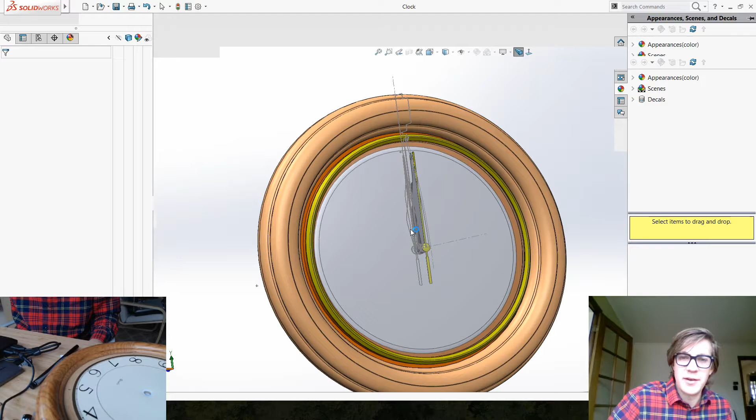Alright, so I'm going to set this down too, and first thing I'm going to do is go back into my SolidWorks model, so let's go find that. We'll build clock animation, here's my SolidWorks part. It's fine, I don't know what changed there. I'm going to open this back up and grab a few key dimensions that maybe I missed when I was just sort of estimating without taking this thing apart during my first build, and that was sort of the video before this. If it's close enough, this is looking pretty close to me.

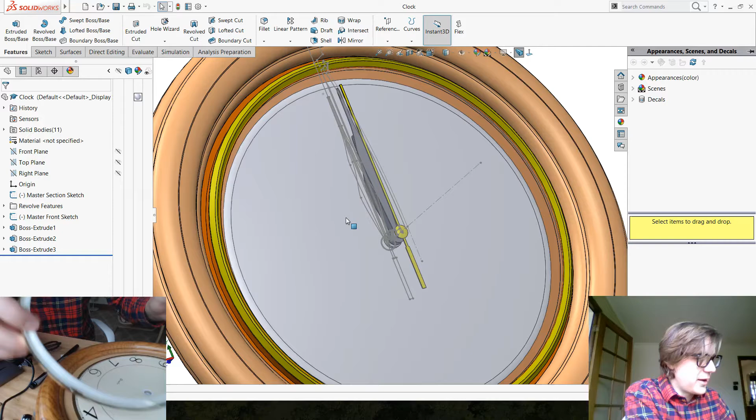The one part that I kind of missed was inside this glass part. There's another piece of plastic that held the metallic bezel to the glass and held everything in place. So I might build that really quickly because you do see sort of the inside of that in the rendering. I guess we will see that in the rendering. So I'm going to go back to my master sketch, which I had set up on the right plane, square up to it, and it sort of fills in the gap between the clock face and where the glass is, so I'm going to just add an extra line here.

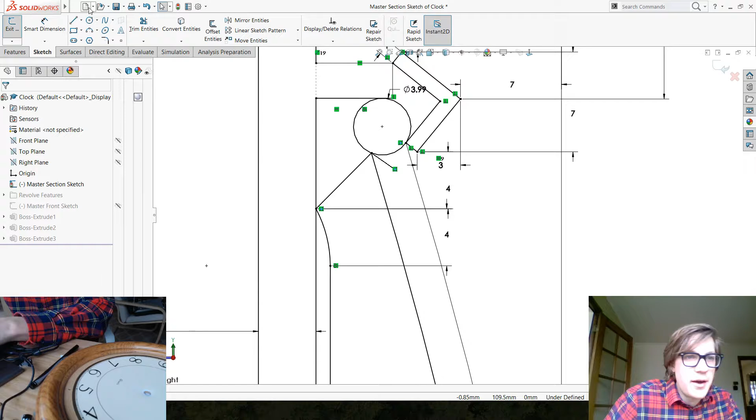Again, because this is purely aesthetic, I'm just going to set this up in a way that I can build a quick part in my revolve. Sure, it's like a millimeter thick, not that important for this aesthetic model, but what is important is I'm going to go back.

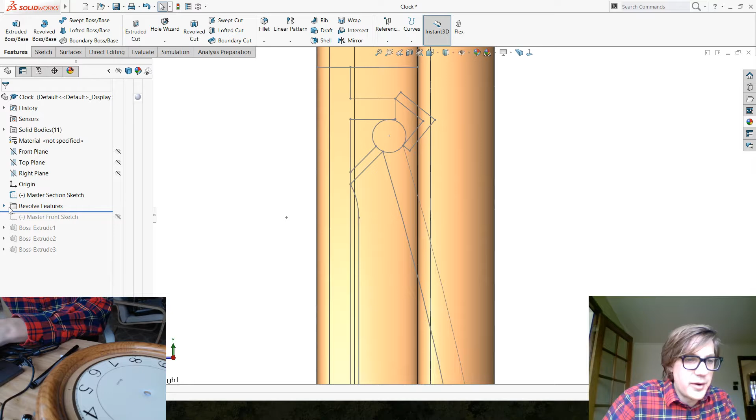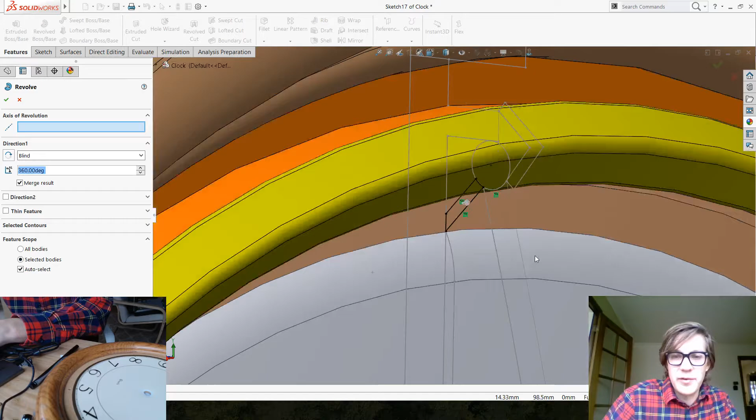I'm going to actually roll all the way back to when I was building my revolve features, sketch in the right plane again. Convert a bunch of lines from my master sketch to build this extra plastic piece that I discovered once I tore this thing apart. Make a revolve feature. I should be able to pick this line from the master sketch since I've been converting it. You can see where that part's going to revolve around. I don't want to merge the results, I'm going to just say OK, and it puts it in place.

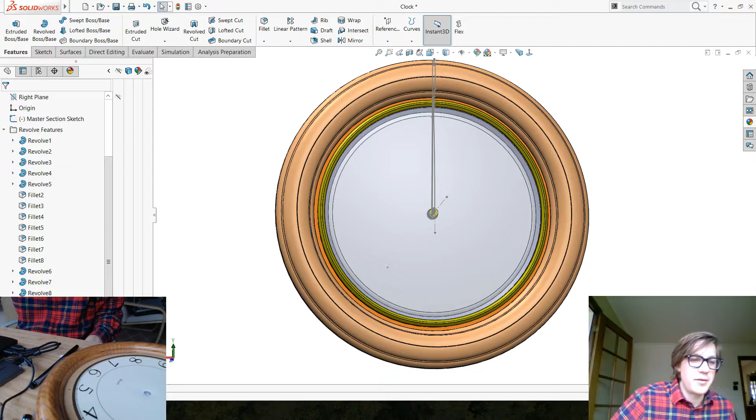There we go. Okay, alright, so there are a couple things I want to do, let me just drop this in here. Aesthetically, to make sure this clock is ready for me to bring it into Keyshot, these are also things that I sort of noticed on the real clock as I took it apart.

I will add a couple more aesthetic fillets, but a big one that I think will make a big difference in Keyshot - I noticed the wood grain, let me switch cameras here to my desk capture. You'll notice on the outside of this frame, the wood grain kind of changes as you work your way around the edge.

That's because there are a couple joints between different sections of wood. I'm going to try and make that - I forget what kind of joint that is, a biscuit joint maybe - I'm going to try and make that cut in my model so that when I import these different parts into Keyshot, I can apply my wood grain texture to each part with a different mapping.

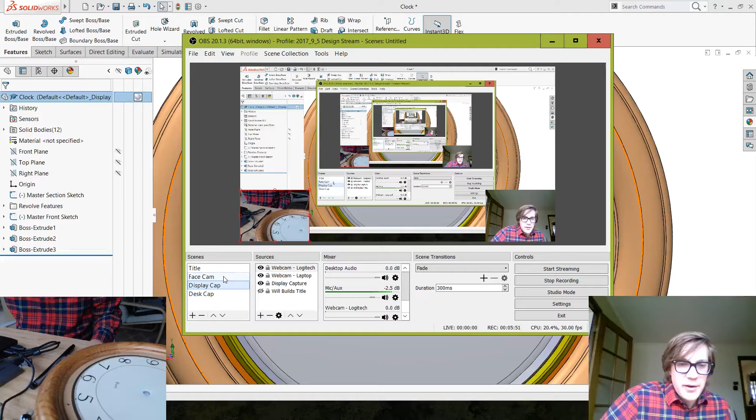So let's go back to display, and I'm going to have to set up a plane really quick. I'm actually going to use a top plane as a reference to create a new reference plane, and I'm going to make it at a 45-degree angle from my top plane.

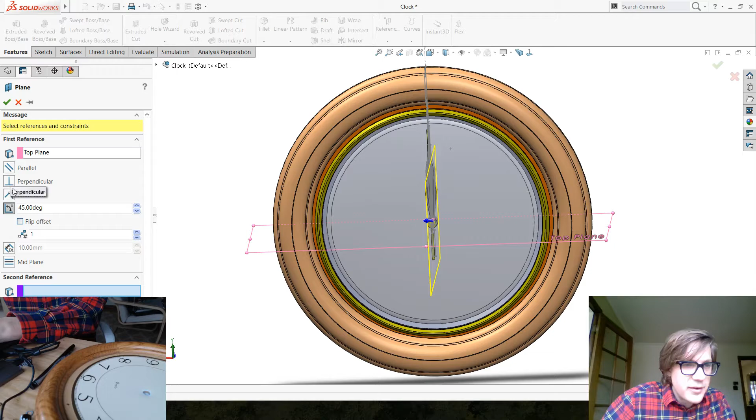I don't really need a second reference, although I feel like it didn't quite do that. My second reference is the angle, like an axis that I want this angle to be at. Okay, so see, I'm setting up a plane that's 45 degrees different.

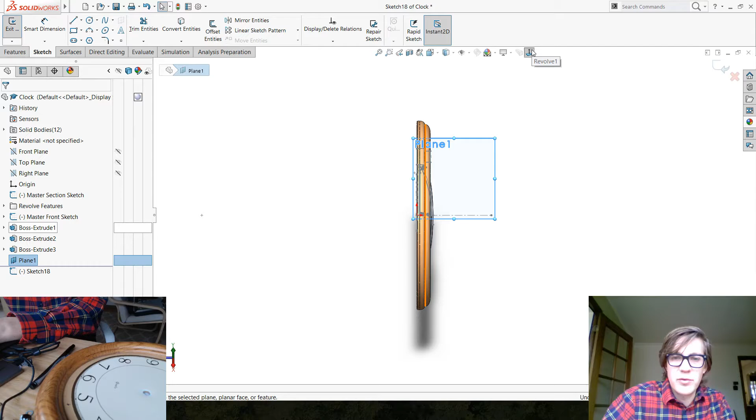Okay, I'm going to sketch on this plane, and I'm actually going to build in this biscuit joint, I think that's what it's called, onto my wooden part. So it looks like from the front it kind of dives in most of the way down the arc.

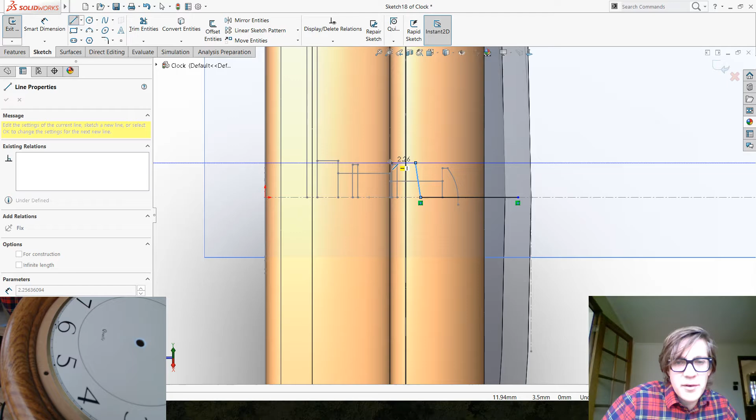It jumps over, dives down, to here, cuts back over, does two of these kind of things, before it goes back to center and then all the way out the other side.

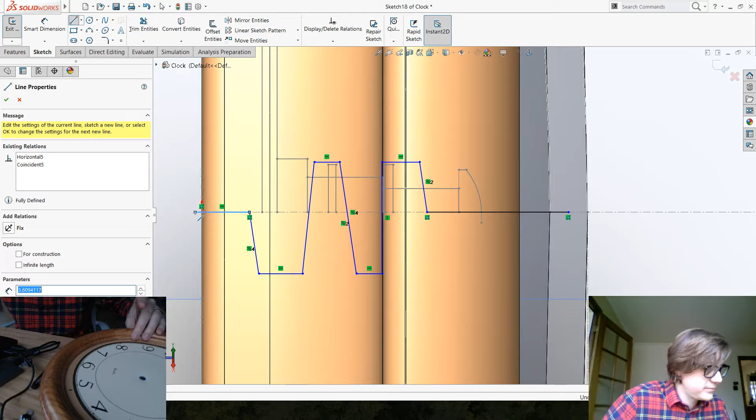Okay, again, I like to sketch this stuff in rough first, then I can do some dimensioning based on some measurements. So I'm going to turn on my calipers. It looks like that whole joint is about 9 millimeters wide, so from the center, that means it should be about 4.5 millimeters.

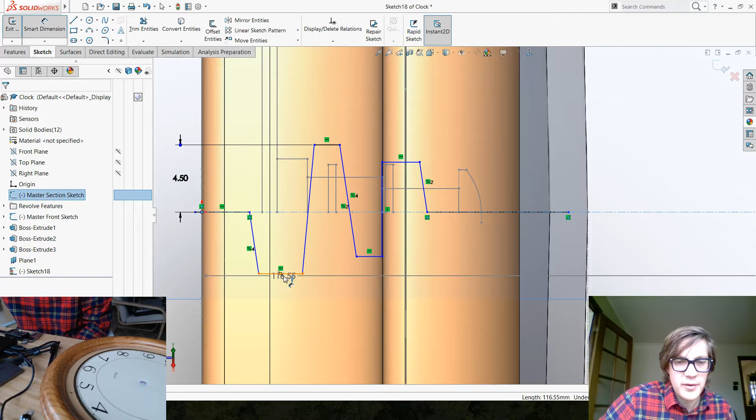From here to here, same. I'm going to make sure that these lines are collinear. I'm going to just add a quick relation there - make these collinear.

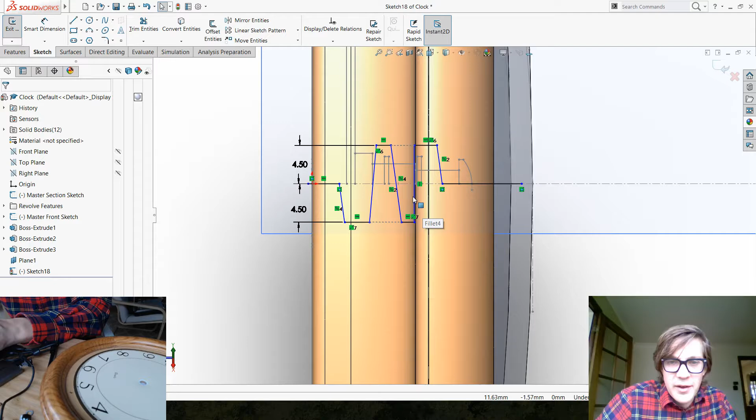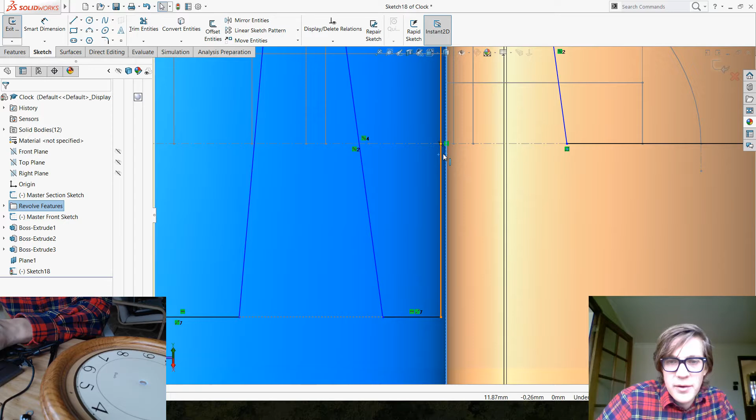Alright, I am drawing, I kind of rotated here. I want to make sure that this flat line is even. Oops, let's see if I can pick that line instead of the surface. It's kind of tricky. There we go. Shoot, try again.

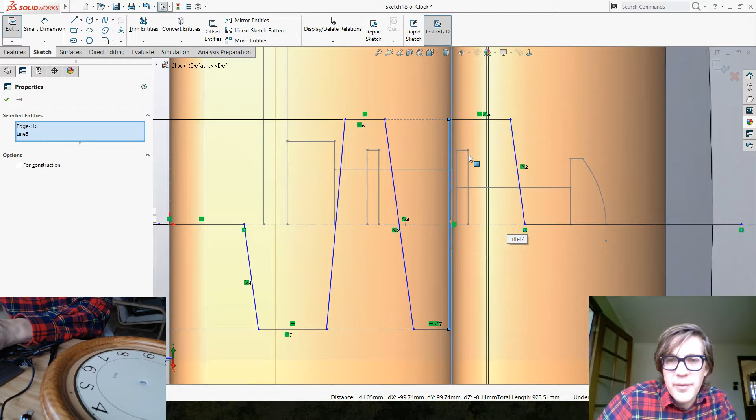I'm trying to make this line coincident with this edge right here. Come on. Yeah, there we go. Man, maybe it doesn't want to let me do that. You know what? I'll make it close - I'll make it coincident with this point here instead, and we'll just see how it looks.

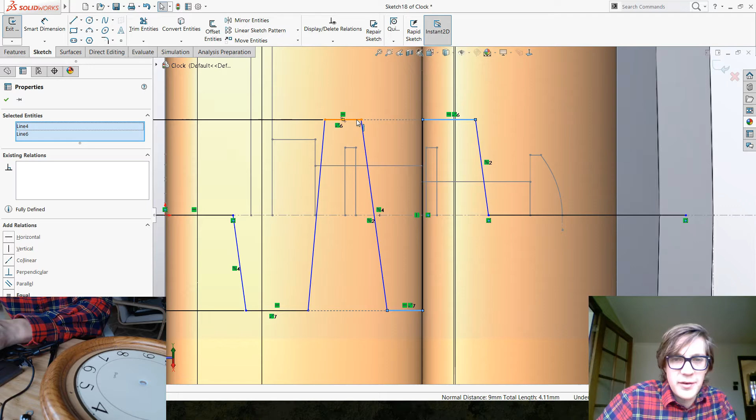Alright, so it looks to me like all of these edges on my joint are roughly the same size, so I'm just going to set those to equal. They're even.

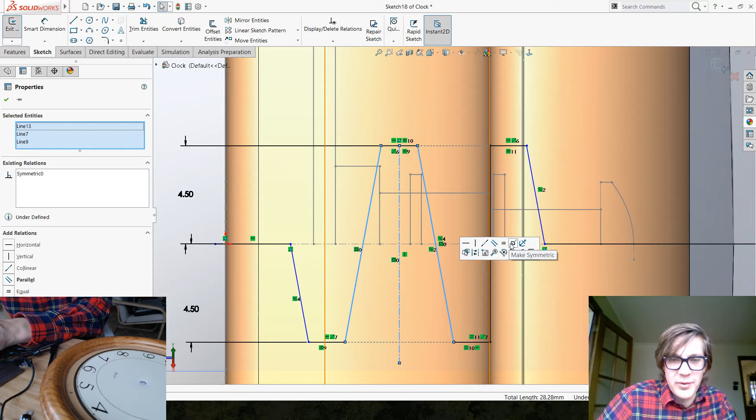So I'm going to use a center line here to say that these should be symmetric or reflections of one another. That kind of squares everything up. And how wide are those? About 3 millimeters.

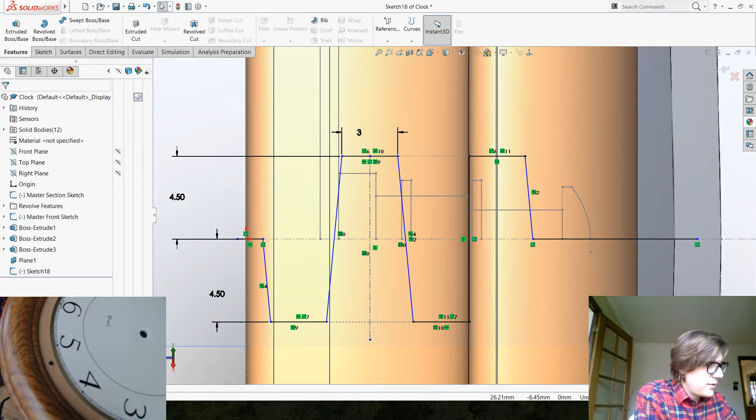Alright, I should be able to get some measurements here too. So from the top down, that's about 4.5 millimeters.

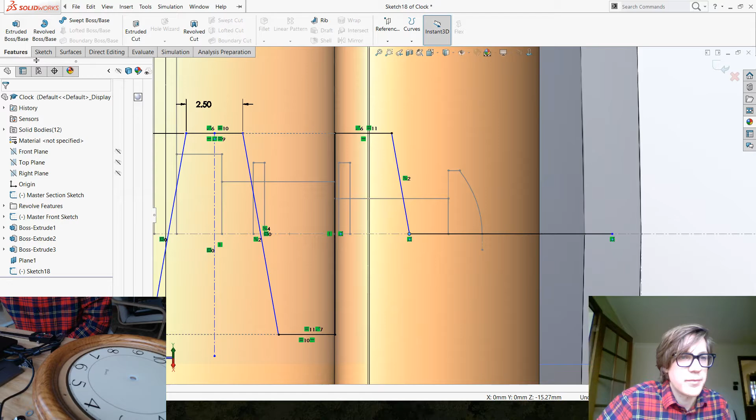Actually we'll go from a more solid point here - this is actually closer to like 2.5, because from here to here is about 3.25. That actually looks a little off. I'm just trying to get the shape right here. Let's try 3 - okay, that's actually pretty good.

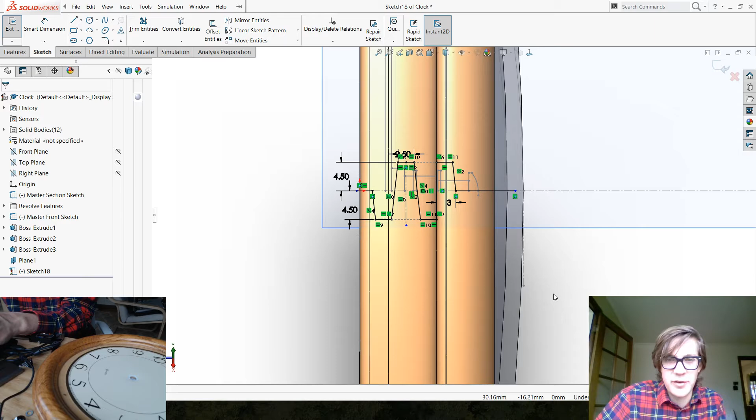So you can see I'm sort of sketching in this biscuit joint kind of thing, again not sure if it's a biscuit joint. Let me get out of this. So notice I didn't put this sketch on either of my two master sketch planes because it actually needs to be sketched in a different plane. But following the same rule, I'm going to label this master joint sketch, save.

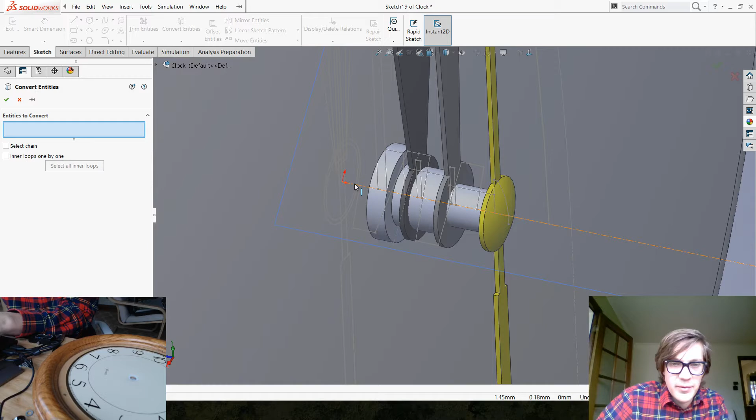Before I do a cut, I'm actually going to create another sketch on that same plane as my joint sketch and convert all of those entities over. So actually, I wonder if I might even be able to just pick the whole sketch and say convert it - yeah, that's good. Okay, now because I want to use it to split apart this wooden outer bezel, there are a couple ways I could do that. I think I'm going to actually do it as a surface, and you'll see why in a second here.

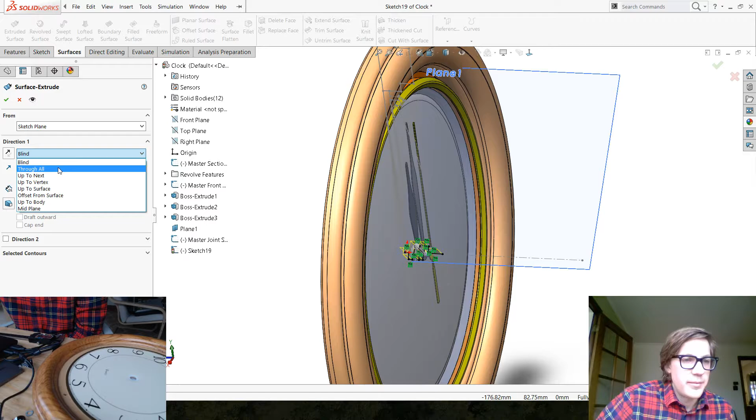I'm going to do an extruded surface through all, in both directions, so it's going to intersect the entire thing. I'm going to say okay, go ahead and do that.

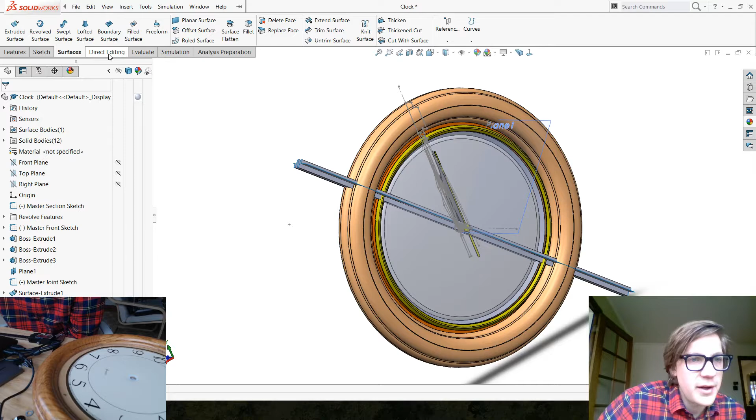Because I need to actually cut this part into 4 sections, I'm going to use a direct editing feature, the circular pattern, and instead of patterning a feature, I'm going to pattern a body.

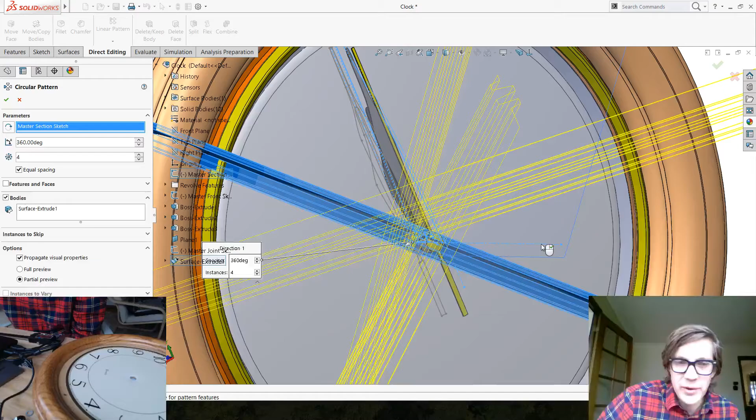In this case, the body I want to pattern is the surface body. How do I want to rotate? I want to rotate around—I wonder if I need to build an axis. Yeah, it doesn't like that. Let me clear that selection.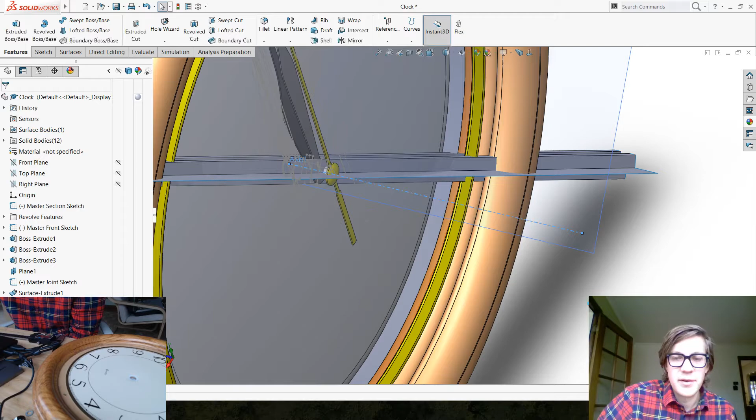Before I can make the circular pattern, I need to make an axis of revolution. So I'm going to go back into my features, make reference geometry, and instead of a plane, make an axis. I should be able to just pick a line here, and say okay, now I have this blue dotted line axis.

Now I should be able to do my circular pattern, either in features or direct editing tab. Again, I'm going to pick a body. I want to pattern this body around that axis, if it's hard to pick. And I only need 2 of them.

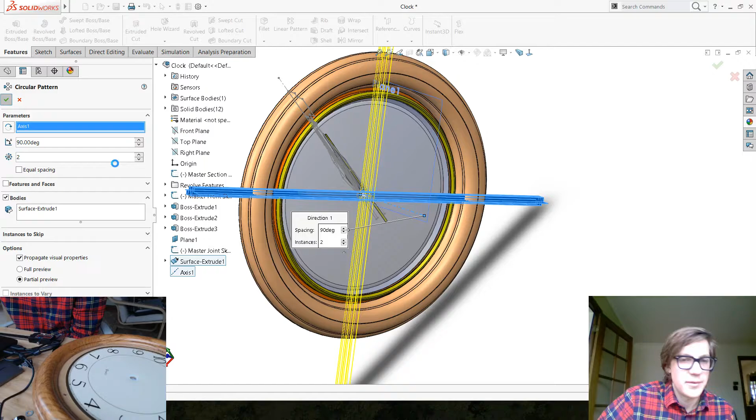I want it to be 180 degrees—nope, not 180, 90 degrees. There we go. Okay, so see how I have these cutting tools. You can almost think of them as a big blade that's going to cut this thing apart.

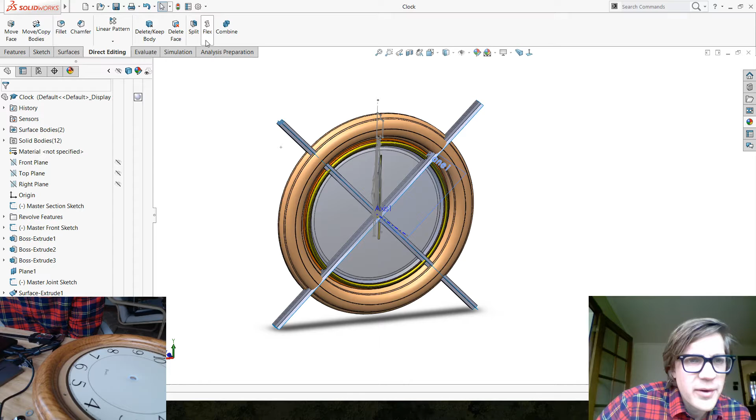Now that I have that, I'm going to save, and I think I'm going to do this as a split. I think that's in direct editing. Split—I'm going to use that surface and that surface as my trim tools.

My target bodies that I want these surfaces to split are really just this one. Oops, I got to pick down here. This body.

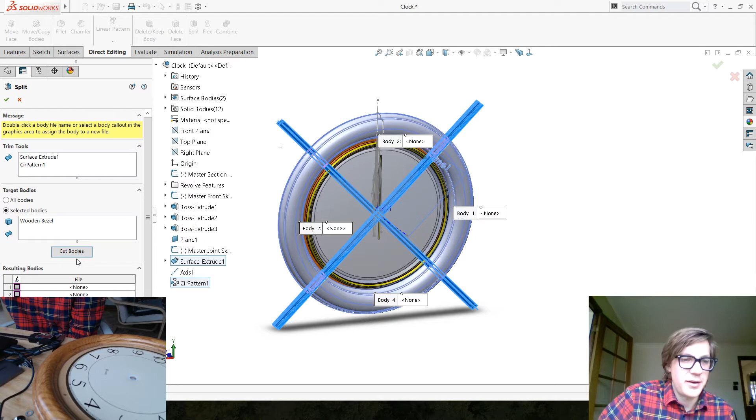Go ahead and cut the bodies. And yep, all 4 of these are the bodies that I want to keep. So I'm going to say OK.

Ha! Hold on, let's edit this. I don't know why it deleted them. Oh, I don't want to consume the cut bodies. There we go, so they should be cut.

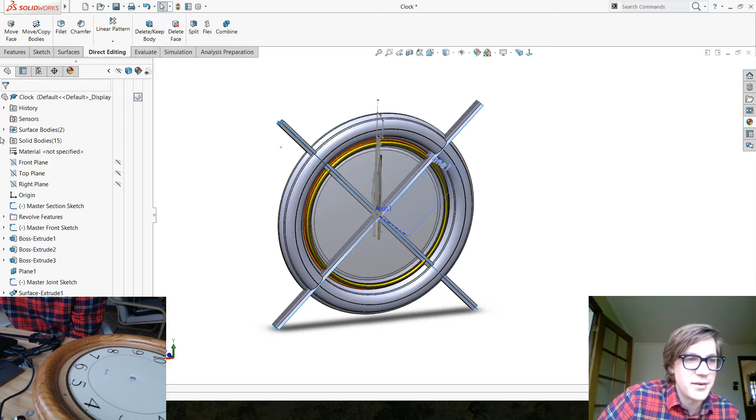Let's go into my surface bodies, and I'm just going to hide both of those. Okay, cool, see how it has that joint on the side?

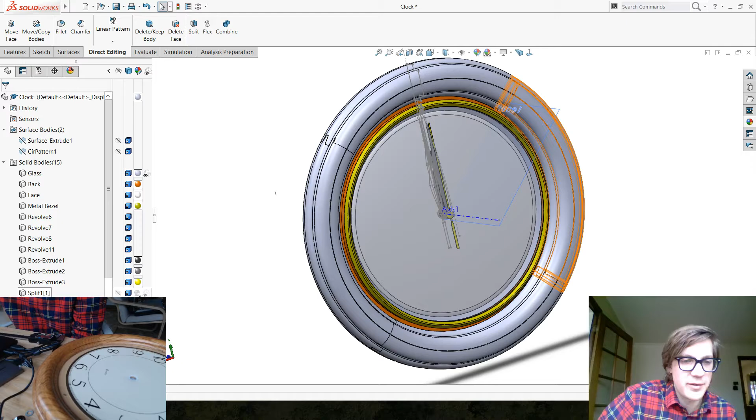I'm going to open up my solid bodies folder, and it looks like, yeah, I've got 4 brand new bodies based on my original outer piece. Just to make it easy for me to see, I'm going to change their colors to something so I can tell the difference and see what those joints look like.

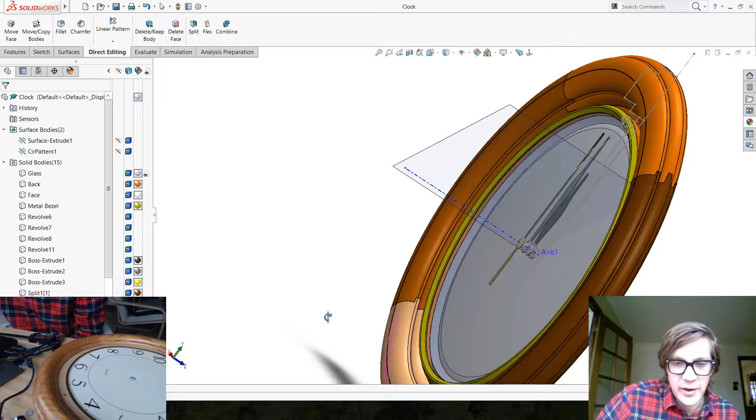Save. Okay, yeah, you can kind of see that I've got those joints working their way through that part. It's a subtle detail that'll make a difference once we actually render this thing.

Okay, that was the big change I wanted to add to the model, and I think we're pretty good. So I think it's just about time to bring this thing into Keyshot. There's one more step that I'd like to make, so I'm going to save this one more time.

Minimize this down, and the next thing I'd like to do is go to my face cam. So the clock has a face, which is really just a printed piece of paper. I used my phone to take a picture of this, as straight on as I possibly could, and rather than rebuild this in Illustrator, I'm going to bring it into Photoshop and make sure it's nice and round, and we're going to actually use the photo as a label in Keyshot to apply exactly this graphic to our rendering. Alright, so let's open up Photoshop.

It really doesn't matter the size of the image in millimeters, as long as I have enough pixels, a high quality image, and it's perfectly round, it should map just fine. So I'm going to create a new file. It really doesn't matter how big this thing is.

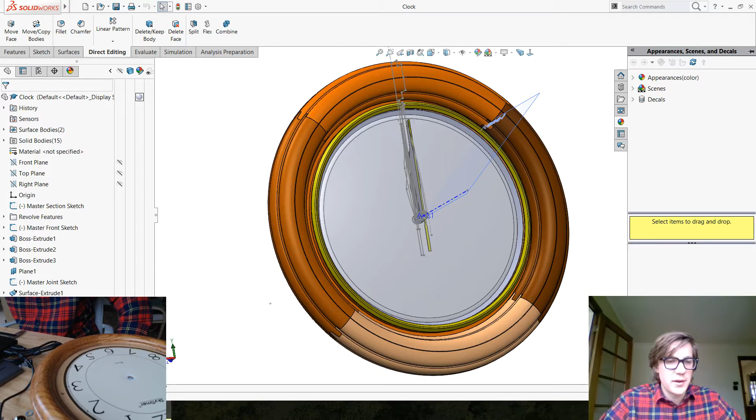And actually in Keyshot, I'm going to pause the real-time rendering because it takes a lot of juice from the graphics card - or no, from the CPU.

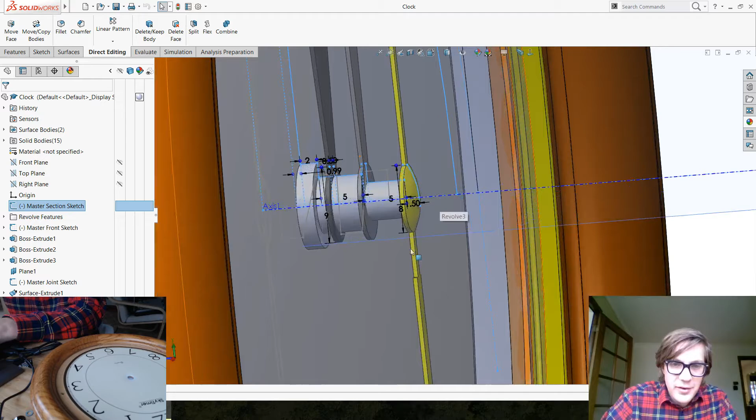Okay, so fortunately I'm using a master sketch, and there are a couple ways I can do this adjustment. I might just reduce this down, which should move my hand in. If I save this, I'm going to right-click to delete these two surface bodies as well, because I don't need them in my Keyshot part.

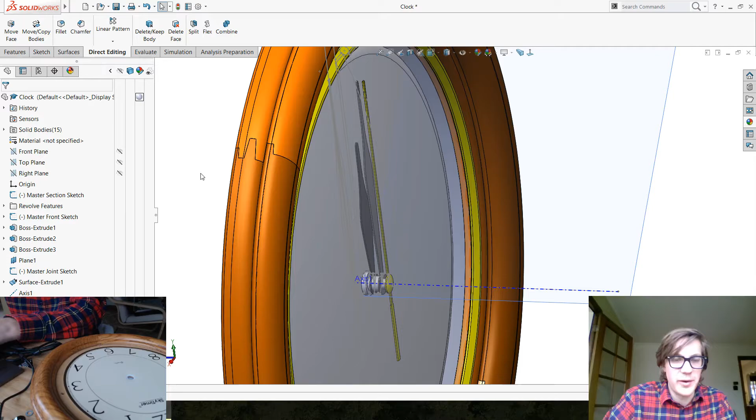Save that part, we'll go back to Keyshot, unpause, and let's see if this works. I should be able to re-import that same part and say update geometry.

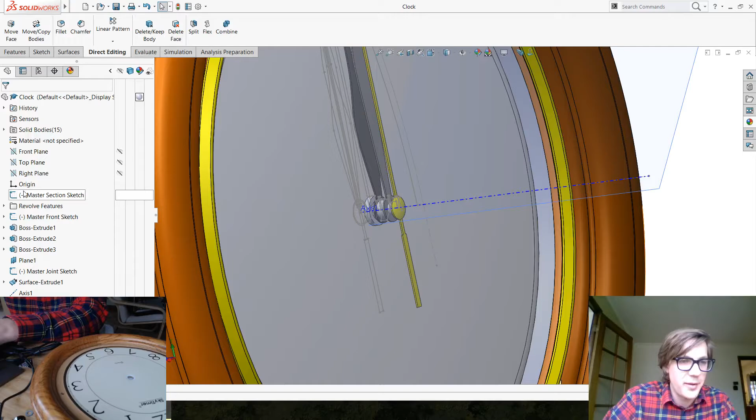Yeah, there we go, and you'll notice it just updated the existing part. Looks like it's still poking through a little bit, so I'm going to go back into SolidWorks and do the same thing again in my master sketch. These were estimates when I originally did them.

Let's see, I might actually go into that sketch, look at it, and move some of this stuff around a little bit more. Looks like we were close.

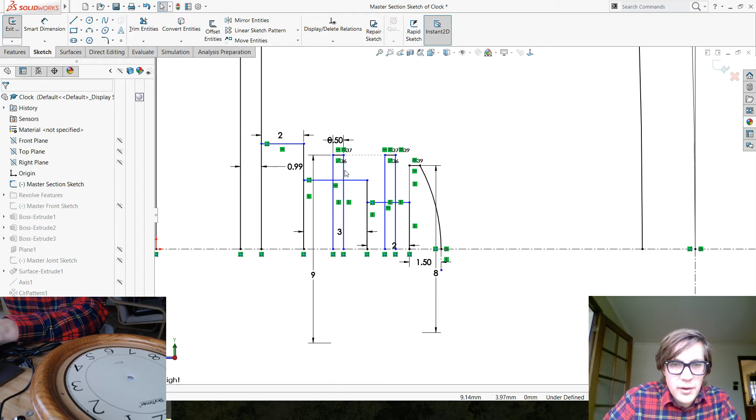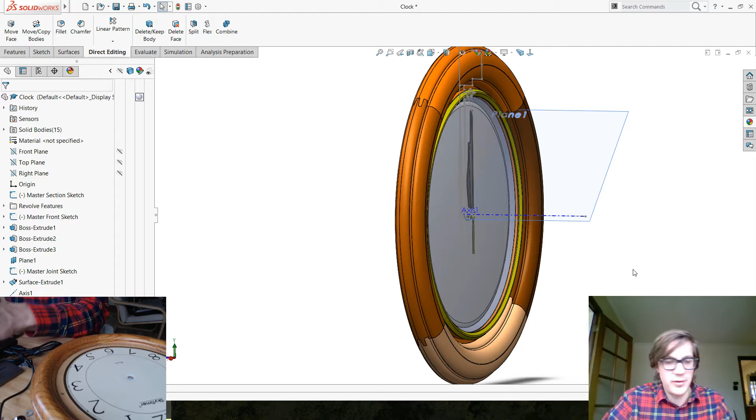Just changing some of the offsets of this stuff. And because we have it set up as a master sketch, all of these movements I'm making in my one master sketch should update my real geometry and all of the sketches I used, like converting them from the master sketch. So I'm going to save the part, go back to Keyshot.

Import the same model again, make sure instead of add to scene, I'm updating geometry. Okay, now I don't see that clock hand poking through like it was before. So I'm going to save my Keyshot file.

Clock Animation. Okay, I think we're off to a pretty good start.

Now, the first part of this Keyshot demo, I'm not going to explain too much. A lot of you guys are already familiar with the basics of dragging materials over in here, and we'll do lighting and all that good stuff too. So we'll start with a really basic - you know what, we don't have to do the environment yet. We'll do some basic material application stuff.

We'll start with wood because that's always fun. I'm going to use procedural wood so I can get the grain looking proper on all four of these parts. And I am going to want to change the orientation of the grain on two of these.

Mapping tool, where is the angle? Alright, so I'm going to rotate this 90 degrees. Okay, so now the grain is going a different direction on both of these.

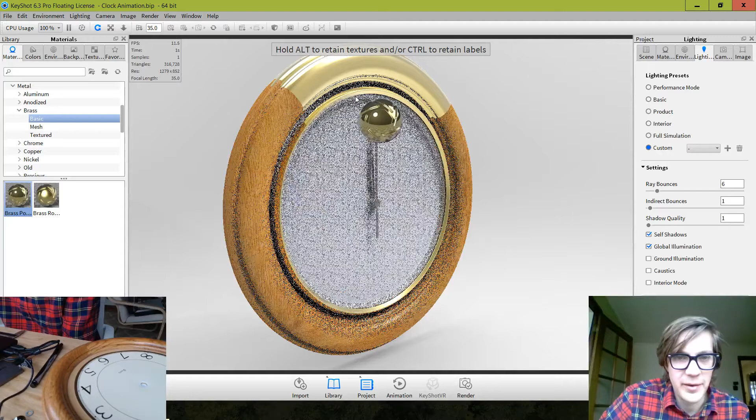That's interesting. I wonder why those are. Let's see, if I pick this. Oh, that should not be. Oh, I noticed when I dragged my brass to this ring, it also thought it was a part of this top here. So I'm going to unlink the material here on this ring and see if that didn't do the trick. Yeah, I think it did. Okay, now we have a brass ring.

Good, there are a couple other things. This piece is actually like particle board. I don't know if that's an option here under wood. Like traditional particle board, no, probably not. So because it's going to be not really a part of the rendering, I'm just going to use nice matte, kind of like stock material for now.

Alright, so I'm going to hide the glass material on the front, save, and start applying materials to some of these hands. Let's see, we'll go to basic brass again for the second hand.

The hour and minute hands they look painted to me actually, and they're like a painted black color, so I'm going to go find paint. Glossy black paint. Oh, and it looks like those materials are linked also, so I'm going to right click here, unlink the materials for some of these parts. If you notice you're dragging and dropping materials and it's changing more than just the material on the part you want, just unlink those parts. It tends to do the trick.